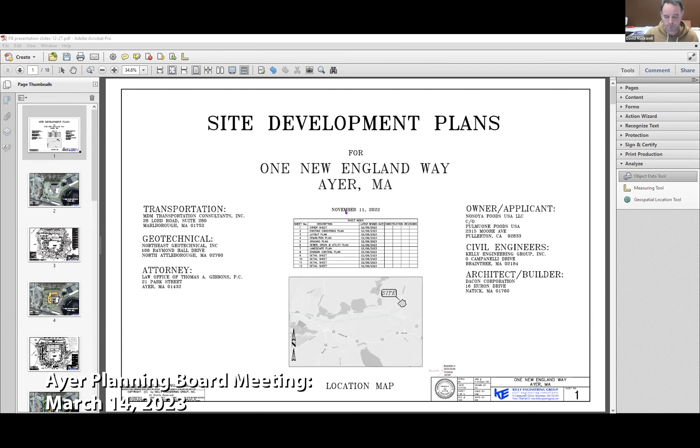So as requested, I won't go down through all the comments, but I'll just highlight some of the plan changes we made. Just to give everybody a brief update, it's been a couple months since we've been there. I think we last met the planning board at the site in January. Here is just an overall aerial view of the site. It's about 14 acres, that's the existing Nasoya facility.

I inserted some of the plans. We did update some of the plans, but you wouldn't notice anything here. This is just the existing conditions plan at the site today. There's a building with gross floor area about 138,000 square feet, and about 159 parking stalls, with loading on this side of the building and another piece of loading here. Access is gained off Westford Road, with a residential zoning district on the opposite side of the road. We have Stony Brook Road, also known as Industrial Way, right here where we get frontage.

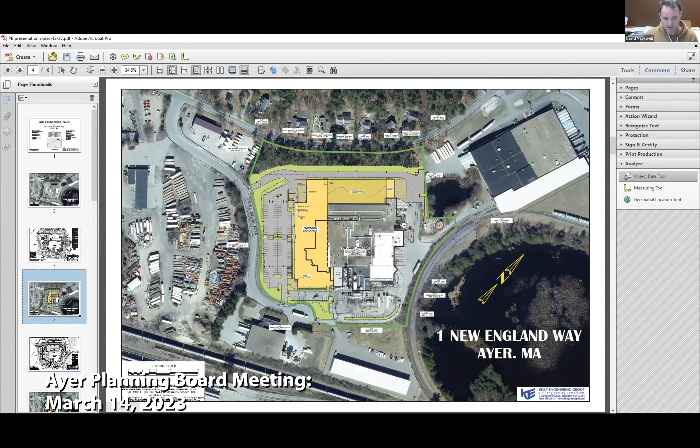Currently access comes in through kind of a wide open curb cut paved area in the front here. The site plan we've put together expands the building significantly, but also reorganizes and adds some green space up in the front, and adds a curb cut for truck circulation around the back. As far as plan changes on this plan...

Reviewing the letter and some of the changes we made, we didn't really see many on this. The discussion point we had out in the field was really to do with how to best handle the existing screening here, which we put in our letter, and we can discuss that in more detail after the planning board members read the letter and the proposal, so we won't discuss that too much.

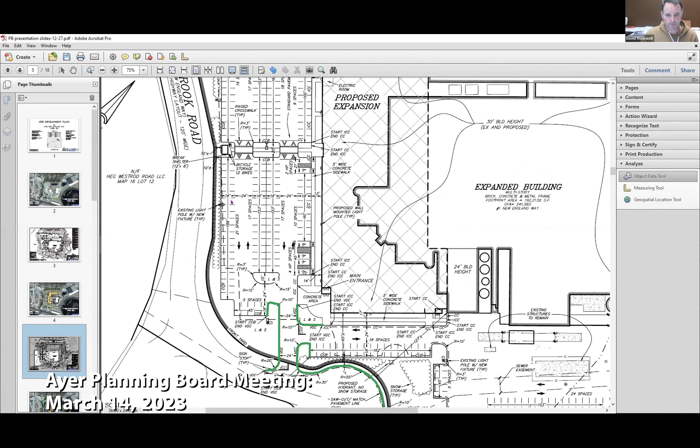Some of the things we discussed at the last meeting and in the field were to maybe incorporate some more granite curbing. I'm zooming in a little here at the front door. So as you saw in that last picture, all this area here is kind of wide open pavement now. So what we'd be proposing is starting granite curbing on this side, bringing it all the way around.

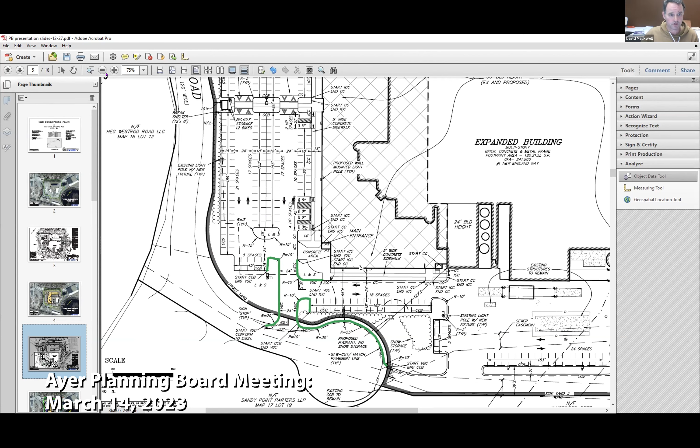This is the customer visitor main entrance to the new building. We're going to bring granite all the way in, around the curb cuts, and then also around the landscaped area in the front. That's one change we made, which I highlighted here to show where that was.

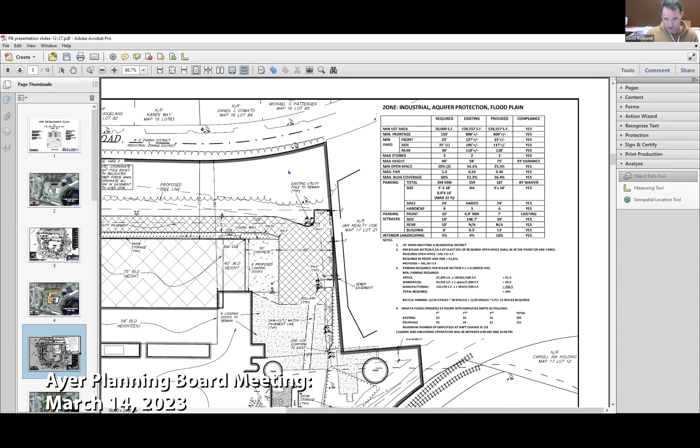Other minor changes to the plan: we cleaned up some typos in the zoning legend relating to parking setbacks. It just said 10 feet or something like that across the board, but we cleaned that up based on the comment. We also added things like the maximum number of employees on one shift.

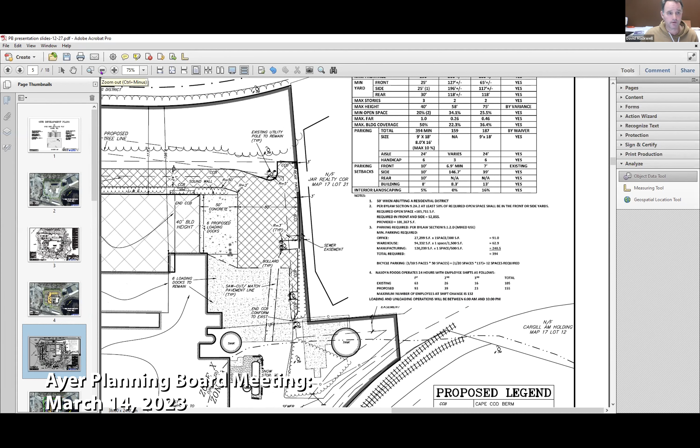We added the anticipated time for loading right on the plan, so it would be restricted in the middle of the night, 6 a.m. to 10 p.m. Maximum number of employees at one time is 132. We have 187 parking spaces. We read the permits into the minutes a minute ago, but we are also requesting the parking waiver explained in the initial cover letter that accompanies the application.

I'll cruise down to the landscaping plan. We made some minor changes there to keep trees out of the sound sewer easement.

The narrative for the Aquifer Protection District and the performance standards associated with those things was submitted, along with a detailed response to the DPW comments, which none of those things would show at this level of the site plan. Some of the comments relate to the drafting of the black and white versions here tonight. We have a full color version of the utilities, which we provided to the DPW as well.

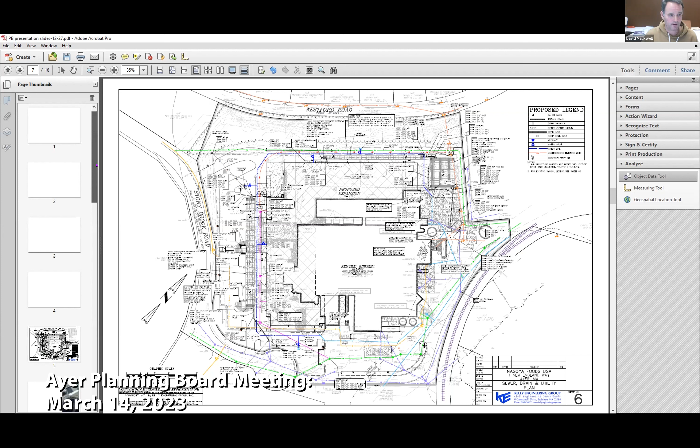So the one thing we discussed in the field, I think the biggest thing, was how to deal with the front yard setback—not setback, but we have to remove some trees in this area. When we did our site walk, we realized we might not have to remove as many as we thought, but we also realized some of the trees in there might be dead and need to be removed.

So within our letter addressing that particular comment, we made a proposal that the applicant would hire an arborist upon the commencement of construction and grading. The arborist would evaluate the slice of forest there, recommend any trees be removed and or pruned, and then add more trees at selected locations to help improve the screen from Westford Road and the residential abutters across the street, with a value of $10,000.

So I think that was the big one we talked about in the field. There were some other comments that came up at the meeting and in the field with respect to potential solar panels and items like that. And as there's not a member here, we'll go through the whole thing again next time. But in general, we didn't change the site plan that much.

We responded to the DPW's comments as it relates to ongoing and future operations relating to sewer usage and pretreatment, and we'll be going through those at the end of the month as well, it sounds like. So Jeff Prince of Dacon is here, and he can fill in any gaps. I do have the full architectural plans here too, if anybody wants to look at anything. Again, very similar slides—the architectural ones are the same as we presented last time.

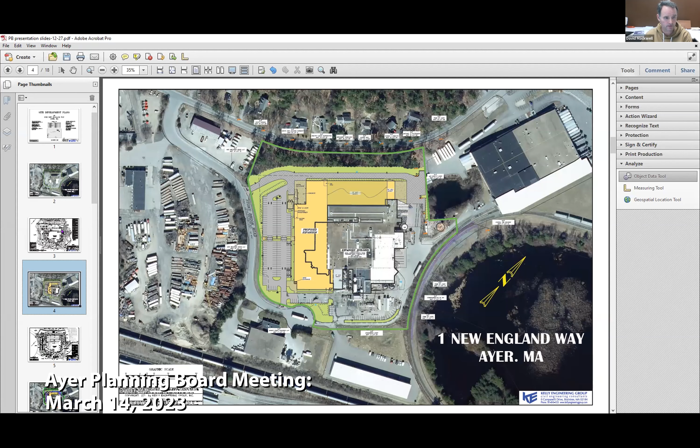So when we went on the site visit, we noticed that in the northeast corner where you abut with Catania, there's erosion that's obviously Catania's responsibility—it's from their drainage—but it's a problem for you because that silt is washing onto your property. Do you know if there's been any conversation with Catania about remediation? Not at this time. We also noted that the DPW may have contacted them; they were out there as well that day with us. And what we did notice is when we commenced our survey, we think that work was ongoing because we didn't pick up all the grade over there, and we did observe the same thing, but nothing has happened at this time.

When this project is constructed, there will be a neighborly phone call to work together to resolve any property line grading issues. We're going to propose a retaining wall just on our side of the property line. It appears that they've encroached with some of that soil. So we see that as more of a neighborly issue that will have to be solved when this project goes to construction.

As far as the fact that it wasn't fully stabilized and they might not be draining the property as they indicated on their site plan, we did not discuss that with the neighbors, and we haven't been out there since.

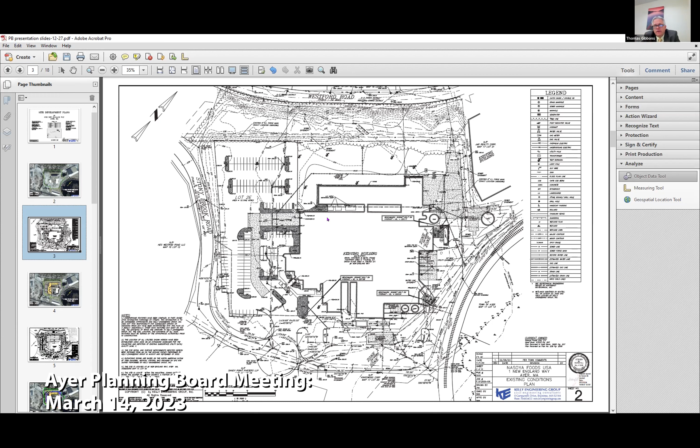Chairman, if I might — I believe I had looked at their site plan, and I think the roof drain was supposed to connect into a collection pipe and get into their system, and it's free flowing right now. I don't know if the zoning enforcement officer has gone out there to talk to them about that, because they're apparently not in compliance with their site plan approval. That's in this area right here.

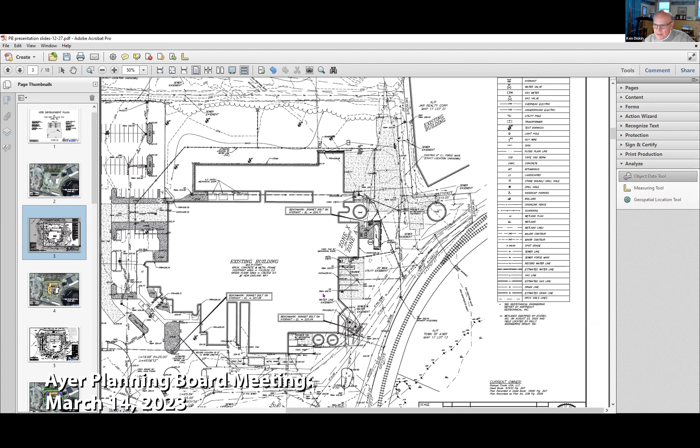I agree, but more importantly to me was the fact that if you look at that drawing, your paving, their work looks like it goes almost right to your existing pavement, yet your lot line is a good distance away, you've got it measured there now. Well, the sewer line easement, what's that, 20 feet wide? 15 feet wide. So they're like 20 feet onto your property, something in that vicinity.

With their work, in this area they come almost out to the power poles right here, to the concrete. I think when we looked at the utility poles, in your mind's eye you think that's your property line, but your property line is well beyond that, towards their building. I did the same thing — I looked at their plan, and there wasn't enough detail in there to show any kind of construction that would make you feel comfortable that it was ending at their lot line. The building is so close to the lot line that they didn't show any detail in their drawings, construction-wise, that I saw anyway.

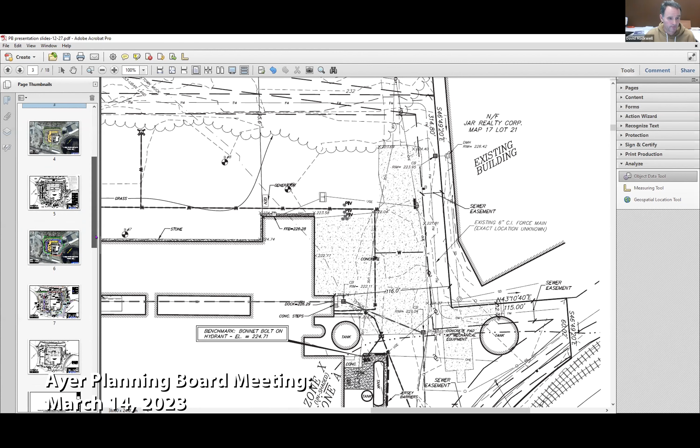But it looks like it needs a retaining wall. So I guess we'd be interested, David, if you're going to show us at least a small detail or a sketch. Well, we did kind of observe that when we revised our plan. I don't think I showed the grading plan here, but on my layout plan, I'm bringing a retaining wall down 3 feet off the property line, as far down as this area where our pavement then veers. We're not coming as close on this side.

All right. Do other board members have questions for the applicant? Yeah, I do.

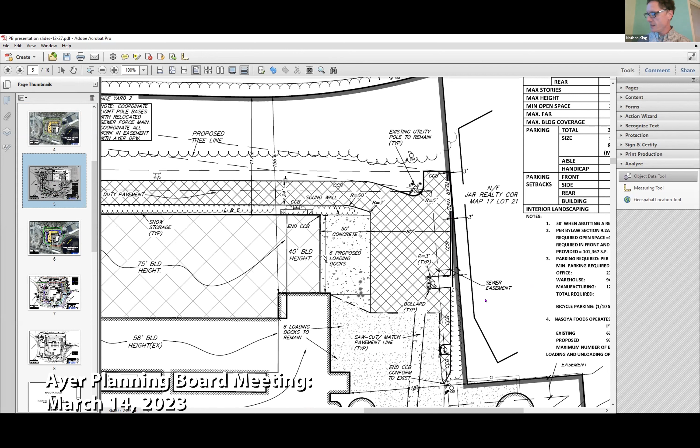David, you mentioned the snow removal — can you just clarify? We did talk about that northeast tank area as future work, but it is going to get cleaned up a little bit. That's one of your snow areas, right? Yeah, that's an area that we've identified that the fence can get taken down, and we can store it on the grassed area there.

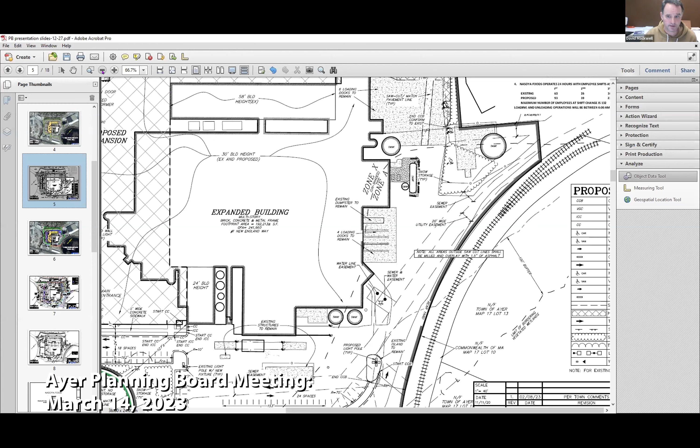Okay, and then do you have any changes you wanted to highlight in the southeast corner of the property, the opposite corner over here, down by the railroad tracks? Anything change on that corner? No, the only thing that changed, that we agreed to do working with the DPW, was they really stressed that sometimes they can't get through here and the pavement's in disrepair. So areas outside of the actual reconstruction, we've agreed to mill and overlay the pavement to give them a solid surface to access this path right here to get to the municipal pump station located on this side. Okay, that'll be good, thank you.

Anyone else? Yeah, I have a few things, but Mark, you want to go? Yes, I just wanted to ask if the applicant's engineer has worked with the DPW yet to work out the amount for a bond for stormwater maintenance. It's probably too early for that. Great question, Mark — what we did is we updated our operation and maintenance plan, and we've sent it to a contractor to get a price.

Oh, okay, great. We don't think the bond is going to be an issue ultimately, and we realize that that's required to go further and execute the whole project. We'll need a maintenance bond. All right, thank you.

Ken, you had other questions? Yeah, the first one is for you, Jonathan. Was there an expectation for tonight's meeting that the planning board would have read those documents provided to us, which were submitted by the applicant, and be prepared for tonight? I believe it was, yes. That's what I thought. So I'm a little bit concerned with Tom's apprehension because we should be well informed at this point in time.

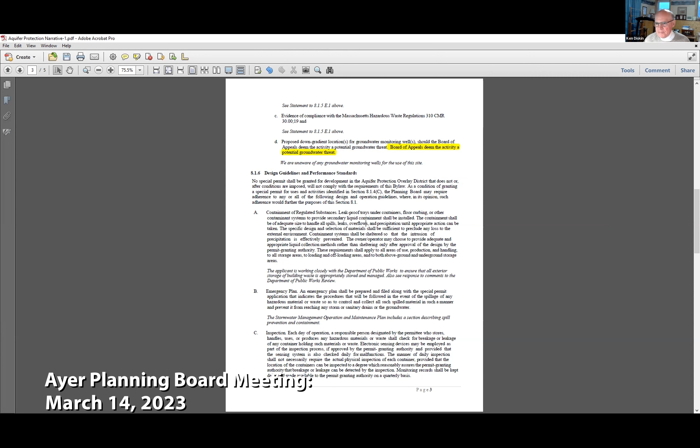And then I've got just questions on the site plan that you can go back to. Okay, so some of these are going to be pretty technical, but I'll go with what I have.

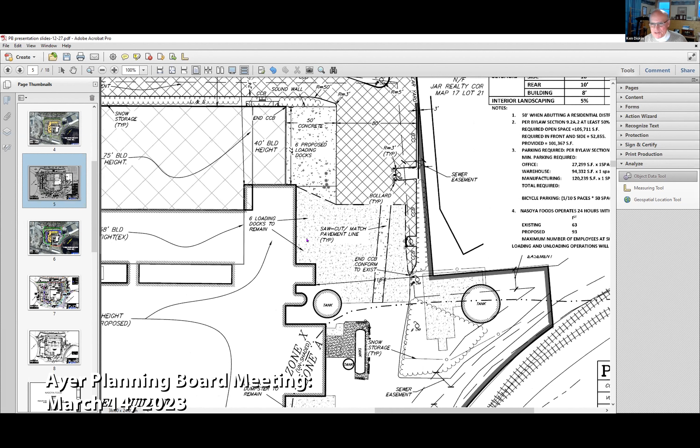So if you zoom into the new loading dock area, there's a little tiny note on there that says sound wall. Just curious what a sound wall is, right above the word concrete there. Oh, I see it, yep, there it is. Go straight up, up, up, up.

I think at one point, prior to looking at this, we were considering a sound wall. That appears to be a typo, a legacy from early planning. All right, we'll take that off. I don't even think it was on the first plan. Okay, I'll look at it now, maybe I missed it.

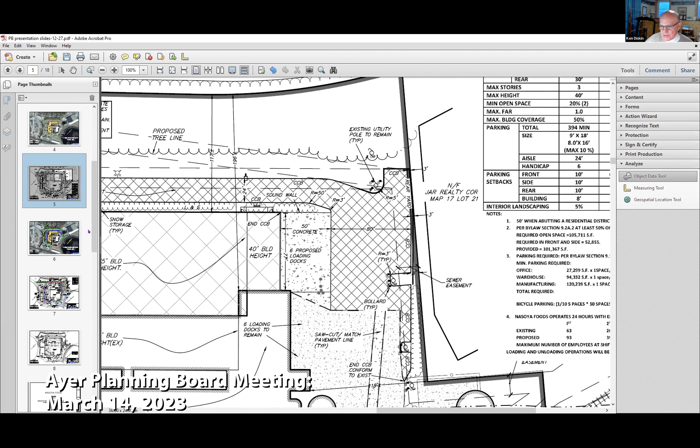This is just a directional question on the trucking. So you've showed this heavy duty pavement section, with the crosshatches and whatnot. Now, do we not anticipate that the trucks are gonna drive in and then nose in back to the loading dock, and back into the loading dock and then drive out the same way they came in? Or are they gonna go around the building and out the other side?

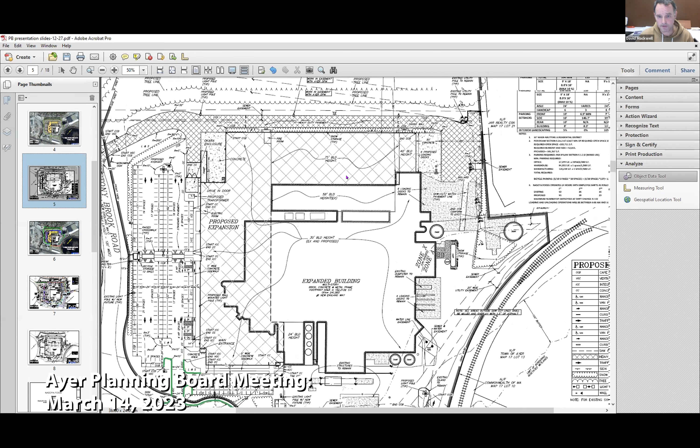They'll probably go around the building, but all of these areas were previously paved. This is the brand new pavement section. These areas are gonna be handled with mill and overlay.

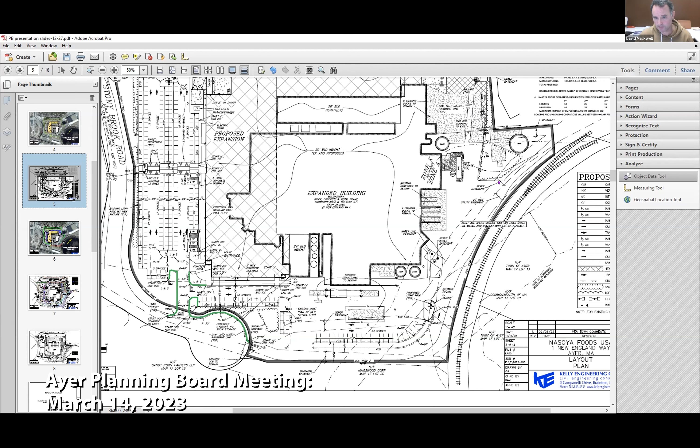Okay, so you're not concerned with the weight of the trucking damaging the other areas and making it any heavier duty pavement like you did on the other one? Well, to be honest with you, this area here is not targeted to be fully reconstructed. When the paving contractor gets out there, we'll probably take any recommendations. If a mill and overlay is not appropriate and they feel that we should repave it, we may do that.

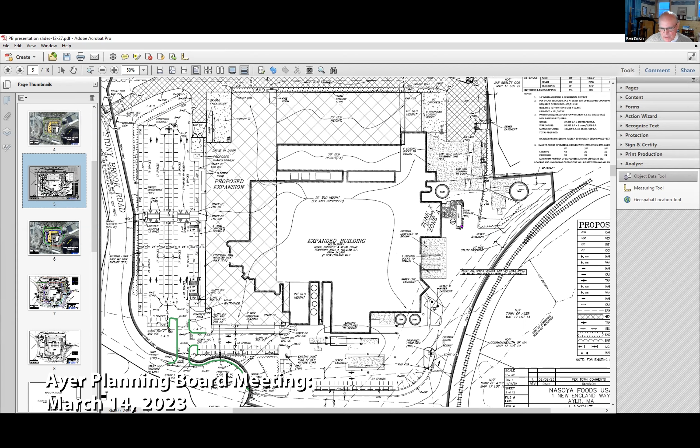And that's a great comment for the applicant. This one is very, very technical, but if you zoom in now by the front entrance where you, just around the loam and seed area there and so forth, just expand that a little bit.

And then you guys have, someone in the office has made a decision to use the integrated concrete curb next to concrete curb. You'll see it in 3 or 4 places here, and you see it to the right as you go along.

I have, let's say, some construction experience. I think you're asking for something that's not that easy to do. I think you should just continue your concrete curb. Think about that, and try not to stop and start with the integrated curb and then add small pieces of concrete curb next to it and joints. Just a thought to think about.

Usually it would be better to continue the curb and then form the concrete sidewalks up against that, rather than trying to go in and out with a concrete edge against the concrete curb. Again, it's technical, but it's up to you guys.

Thank you. So you're not a big fan of the integral curb unless you can use it for big lengths. It's awful, basically. It's especially hard here if you're trying to blend it in with another piece right next to it. In one case, you've got vertical going, integrated going to concrete — you've got like three systems right there.

You'd be better off bringing the vertical beyond the sidewalks and then going to the concrete vertical. I think what we would do is extend the granite to here, and then here — there you go. Then you've got a nice detail. Yeah, I see it now.

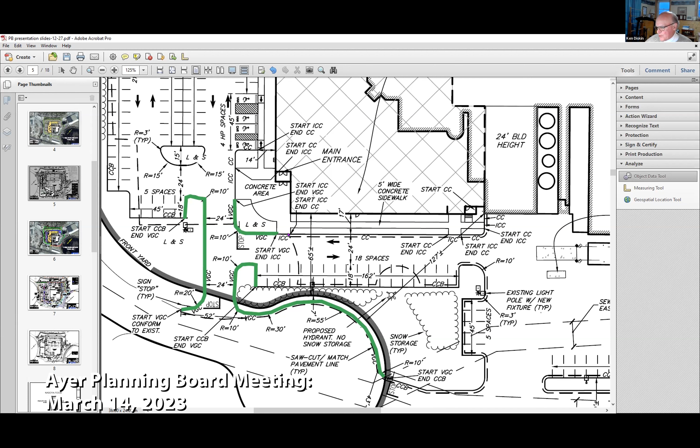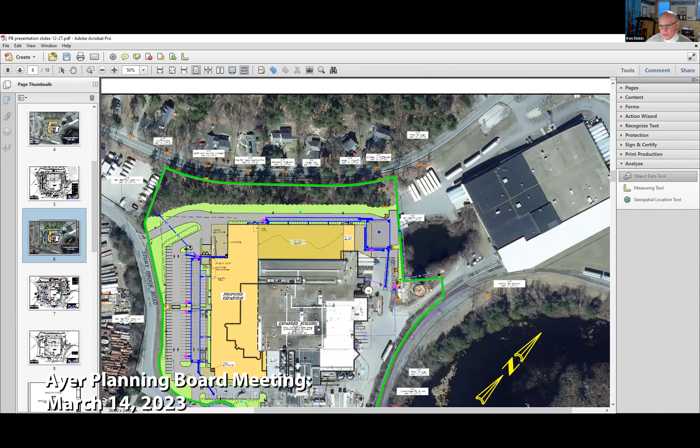Could you use either a drainage plan or one of the plans at the end, even the landscape plan, which shows the subsurface systems? I want to get into this for clarification for ourselves and the public, to the extent that you're controlling the subsurface water on site. So what I'm asking for is a brief explanation of the catch basins on site that are being connected to the new subsurface systems, using maybe the one in the loading dock as an example, to show how you connect subsurface roof water into those on-site systems, and how they're discharged off-site or retained on-site.

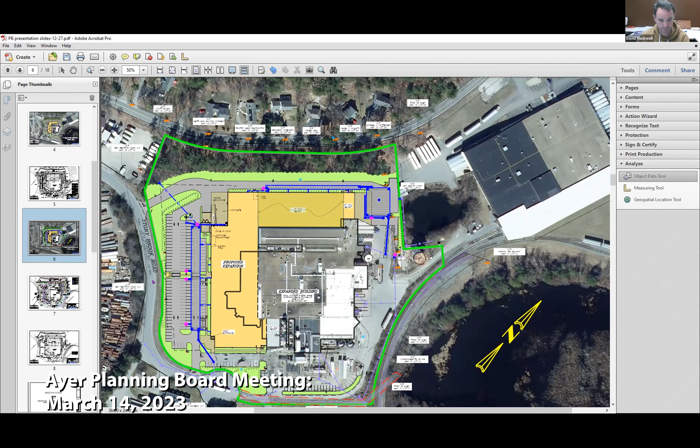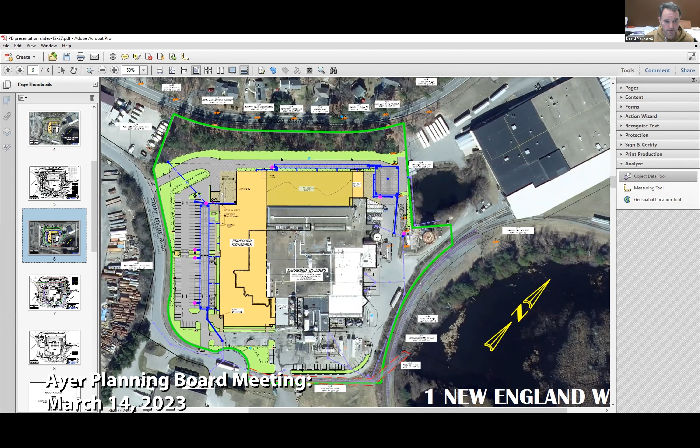Okay, so here I have a color coded site plan that shows the drainage. In this box area is a large subsurface recharge system. There's another one over here, and another one behind the building. The heavy blue lines are drainage lines. We know where these downspouts adjacent to the building are going to be, and we're going to tie those directly into the retention systems. There's one here that will bring it down laterally and come into a manhole. Then this retention system here would overflow into the next one, but it would also pick up more of the parking lot.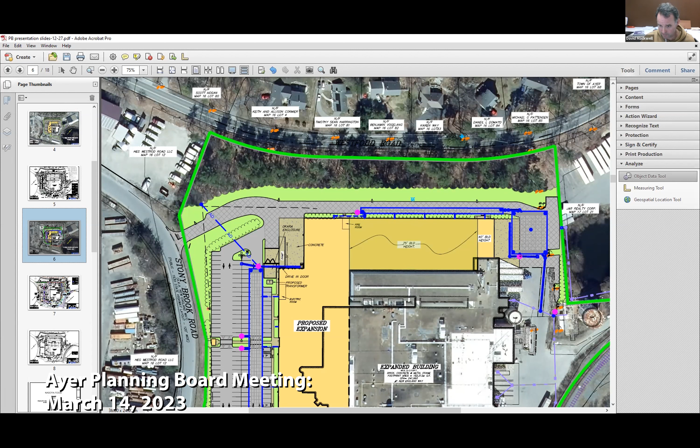There's some catch basins over here. This is actually a trench drain, so it's nice and level for the loading area. That would all come in here. The pink dot is what we call a water quality device to pre-treat everything. There's another catch basin here to bring everything into here.

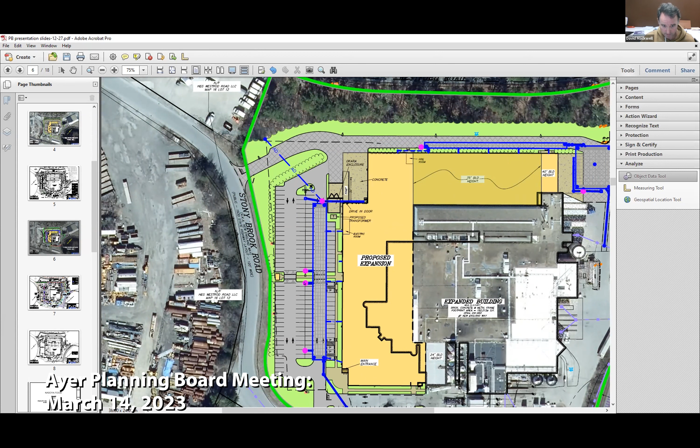On the other side of the property, we have internal downspouts that would be somewhere in the building, and we have them in the lines shown here. We're also creating a low area over here after we grade this, so we'll drain this area. We'll have a trench drain in this loading dock that will come across under the platform. That's a water quality device, and before it enters, these two pink dots would be catch basins with water quality devices added to them. Similar here, and those would come in here.

So at the end of the day, a majority of the property is going to be fully mitigated to the new development standard.

And David, for the benefit of the public, could you describe the construction of the underground detention systems and how they work?

There are Cultec chambers where you would dig down to the parent material, remove any unsuitable materials or fill, and then place stone to help perk. You'd scarify the soil like a septic system. You place the stone, the chambers go on top of the stone, and then stone goes in between the chambers and on top of the chambers. It all gets wrapped in filter fabric. Then we have about a foot of cover minimum, pavement gravel, and then pavement on top of that.

So these chambers look like plastic pipes. Half pipes.

Who's asking that question? Is it Mr. Prince? Jeff Prince, sorry, Mr. Diskin. Jeff, I thought you know how to build that stuff. I do. I thought somebody wanted a quick explanation of the operation of the underground systems for the public.

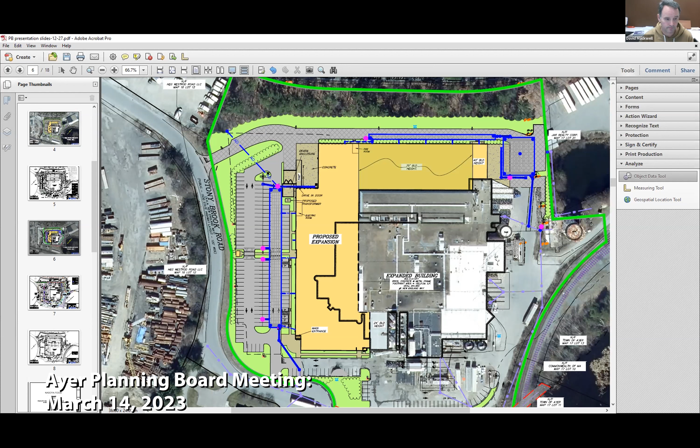Yep, seasonal high groundwater, whatever they call it. I don't think I have the plan with me here, but where testing has been done so far is on the existing conditions plan.

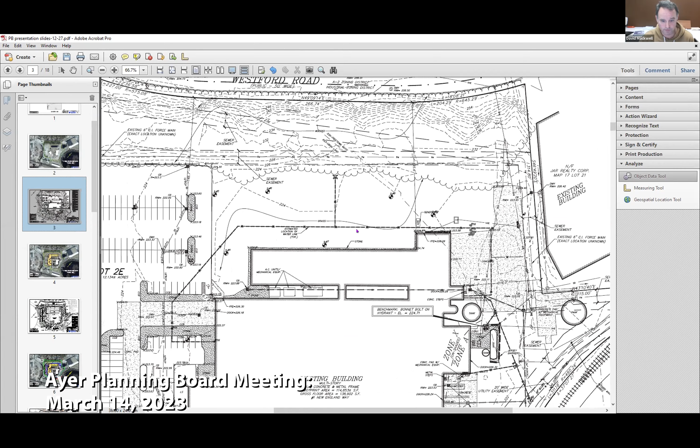We got one more thing, Mr. Chair. So on page 9, David, you have a detail on the granite curb. Looks like it's the company's detail, sure, but there's no dimensions on the size of the granite.

Meaning, I don't know if it's a 4 by something or a 6 by something. Maybe you could clarify that. Yeah, so they're going to be 6 inches wide, 18 inches tall, specified by the Mass DOT specifications called out. So it's granite curbing to conform to VA4 type Department of Public Works Mass Standard specifications for highways and bridges, M9.04.1. Thank you, I'm done for tonight.

I think we have at least one person from the public. I'd like to open it up if anyone in the public has any questions for the applicant.

Mark, I think that's about as much as we can do with this today, right, given our previous discussion? Is that correct? Yes, that is. And I anticipate that for the March 28th Planning Board meeting, we will have received comments from the DPW as well as the other peer reviewers, so hopefully we will make a lot more progress at that meeting.

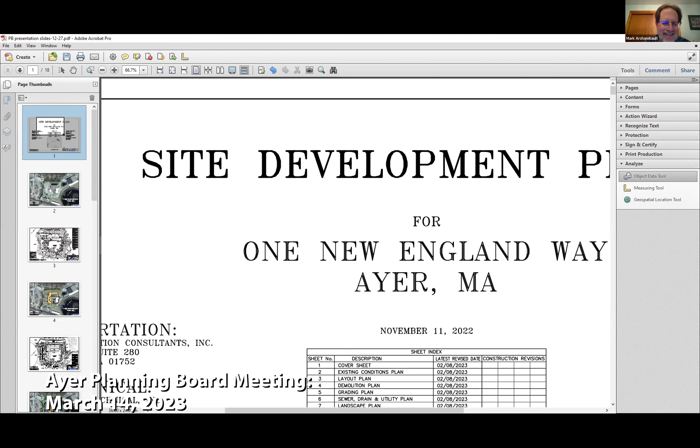We'd like to thank the planning board for staying there without power and having the planning board meeting. It was good to see you. That's too, that's commendable. Thank you. Have a good night. You too.

And I believe what's next on the agenda is, of course, 14 Washington. And I think to begin, I believe we need a motion to continue the public hearing. Is that correct? Do we need a motion to continue the public hearing for Nasoya to the next meeting? Yes, can I get that, please, from somebody?

Mr. King, I'll make a motion that we continue the public hearing for site plan review, stormwater permit, and the Aquifer Protection Overlay District special permit. Do I have a second?

Second, thank you Nathan. Any discussion? Hearing none. Julie, how do you vote? Yes. Nathan, how do you vote? Aye. Ken, how do you vote? Aye. Chair votes aye, it's unanimous. The hearing will continue at the next session.

I also need a motion to continue the public hearing for 14 Washington Street. I'll try that one, Ken. Move that we continue the public hearing for the special permit and site plan of 14 Washington Street. Thank you, Nate. Do I have a second? Second. Any discussion? Hearing none. Julie, how do you vote? Yes. Nathan? Aye. Ken? Aye. Chair votes aye. We can continue the public meeting 14 Washington.

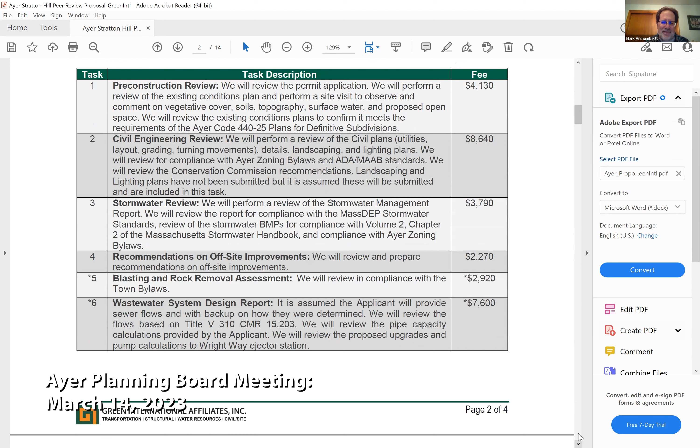And also, I think he needs to do a better job of mentioning the subdivision regs, the site plan regs, and any other regs that would come into play, instead of just mentioning the bylaw, as you mentioned.

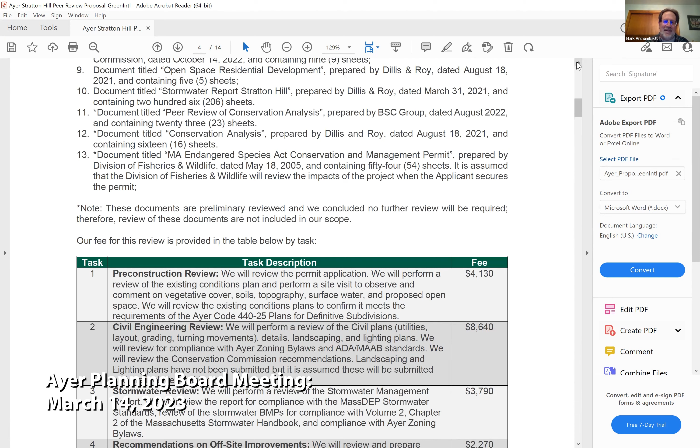So there is time, based on my conversation with Attorney Collins this morning. I think it's probably fair to have Mr. Thorne revise this proposal based on your comments, and we're not going to get all the package materials before March 28th in any case. So yeah, we have time to revise this for the next meeting.

Thank you, Ken, for catching that, because I don't think we can vote to approve a contract if the fundamental document is inaccurate. That won't help us.

I think, Ken, what I'd like to do is call you tomorrow to go over it with a finer tooth comb so we catch everything, so when I talk to Mr. Thorne I can give him a complete list of things he needs to change. Were you saying you'd call me, or Jonathan? Who did you say you were going to call? The engineer for the firm here that responded.

Okay, yeah, can you go down a little further down the page for that list of plans? Yep. Oops, as soon as my cursor works. Keep going, yeah, to the list of these drawings.

So the thing that concerns me here is amongst these lists there are things we've already voted on and pretty much moved ahead on. The primary conservation plan, the topography exhibit plan, the wetland area plan, those were large scale plans he gave us just to look at to get our bearings on the project and whatnot.